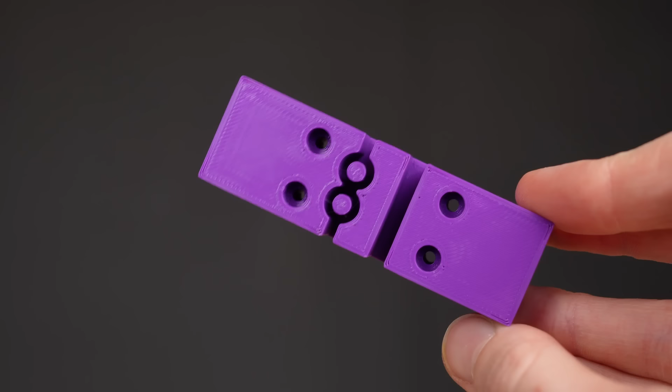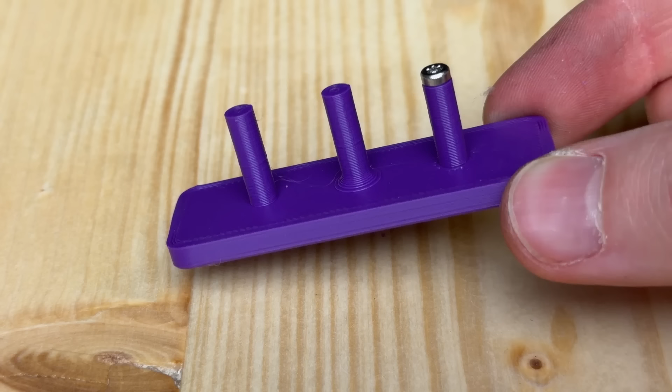In this video, I'll show you how to design for 3D printing. We'll take this gantry that I designed and improve it step by step in strength, tolerances, printability, and visual appeal. The tricks and methods shown here can be applied to any model in any CAD program. I'll guide you through my workflow and share my learnings from designing 3D printed parts for this robot.

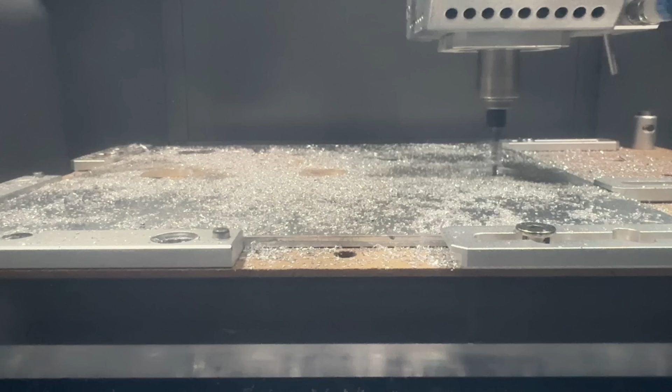Designing something to be manufactured comes with different sets of rules. While injection molding requires draft angles for part ejection, fillets are needed when CNC machining due to the round drill bits. 3D printing offers more freedom, yet it comes with other boundaries like the anisotropy of finished parts. This means that the parts have different mechanical properties in different orientations due to the layer stacking.

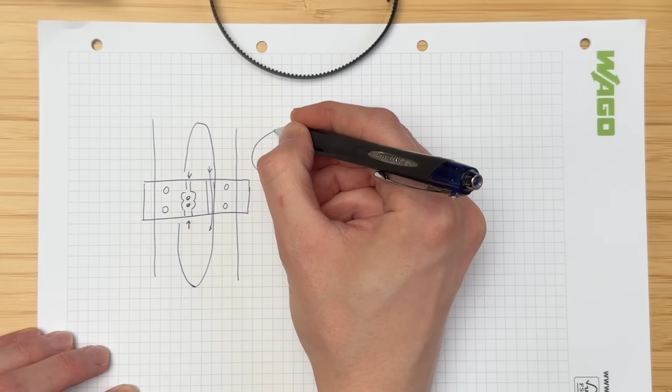That's one of the main things that needs to be considered when designing for 3D printing. And that's exactly what I want to explain to you in this video. We'll turn this sketch into a simple 3D model in Fusion 360 and then improve it step by step for 3D printing. Of course, everything shown here can be applied to any design in any CAD program.

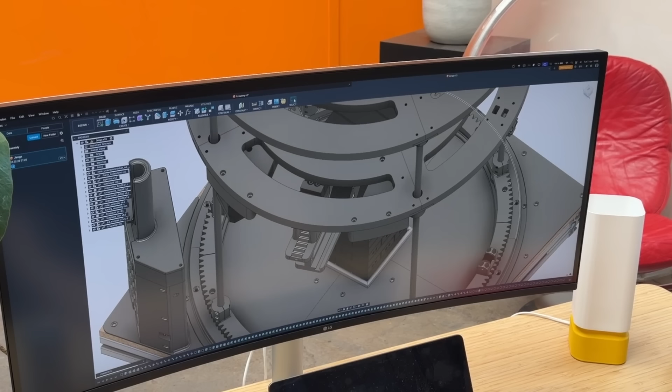So, when you start designing something, you might or might not have your own workflow yet. While designing parts for personal projects and a recent robot competition at university, I found a way that works well for me, but there are certainly other approaches that might work better for you. Anyway, in this video, I'll follow an iterative process, starting by defining an MVP, which stands for Minimal Viable Product. This is the simplest functional version that does the job.

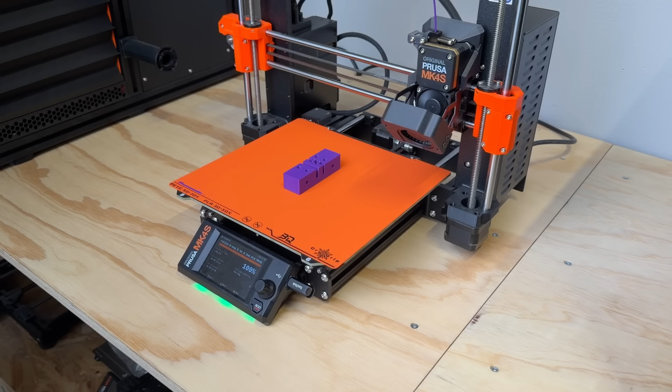Then, this design gets improved with each iteration in different aspects like strength, tolerances, and printability. Especially for beginners with little experience, it's helpful to actually print out some test pieces or prototype iterations to get a feel for dimensions, required clearances, and other potential issues. The more experience you get, the fewer iterations are needed.

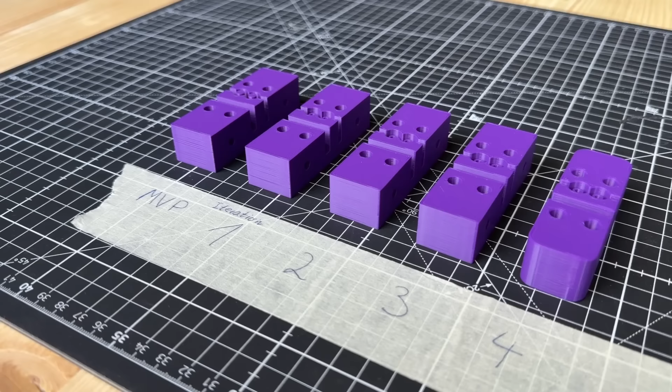While this approach is extremely useful for beginners as it provides direct feedback, there are other opinions on this. Christopher Helmke, who designed 3D printed screw counting automations, has a really interesting take on this that I didn't want to leave out. Luckily, he's located in the same industrial complex as me, so let's ask him real quick.

Okay, so my take is that you should do it completely different to Jan's approach, which is that you should try to make it first try, so only a single iteration. And in my opinion, that's right because 3D printing is much too slow to be part of a thought process. The actual benefit of 3D printing is not that it doesn't have a lot of manufacturing constraints or anything, but that it's low cost and thereby accessible to lots of people.

But there's also a big danger in that, and that is that you will start to print very, very fast. I actually don't like using 3D printers for my creative process because of that. If you start to print something, then you will stop to think about it. And you need a long thinking process about any part to actually get a complex design to work. And if you always stop in between for 2 hours at least to wait for the print to finish, then you will never get any complex system to work, in my opinion.

And the second reason is that you need to have very strong assumptions about how something is going to work to then test them. So the print that you will get out will not have any meaning to you if you have not put a lot of thought and work into it, and you will not improve your design no matter how many iterations you do. Actually, I claim you only have creative energy for like 5 iterations in you, and after that you're done. So don't waste them on useless stuff.

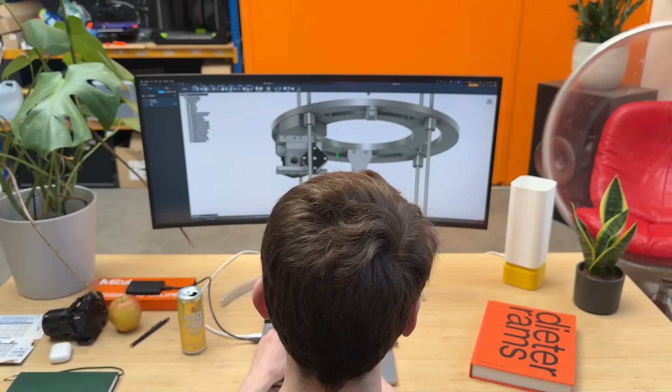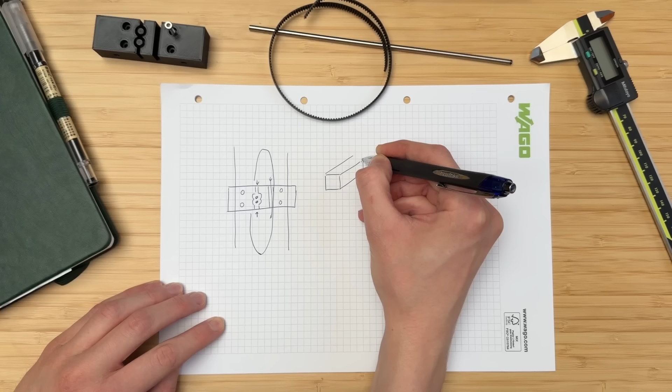So, take the whole process shown in this video with a pinch of salt. Try to resist the temptation of hitting print immediately after designing and take some time to really think through the model first. I needed a gantry for the x-axis of a low-cost robot that plays Jenga, but more on that in another video. For this part, I have a few specific requirements: the outer dimensions, fixing points, the rods it needs to glide on, and the belt attachment.

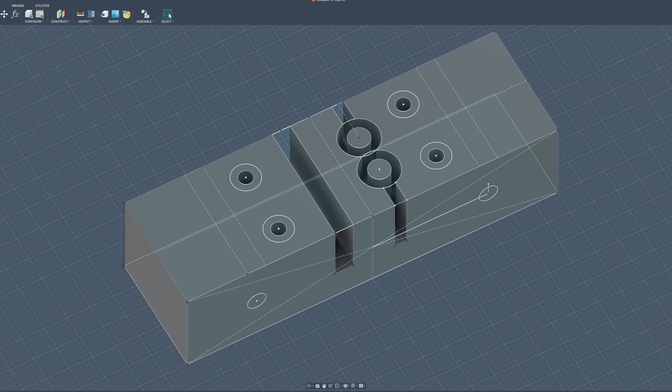To start, I did some research on similar designs, took some notes, and made a few drawings on paper. I then transferred those ideas into my CAD program using simple sketches and extrude operations. What I ended up with was a basic block with cutouts for the 2 rods, holders for the belt, and a couple of holes for attachments. Now let's print our MVP and see if it actually works.

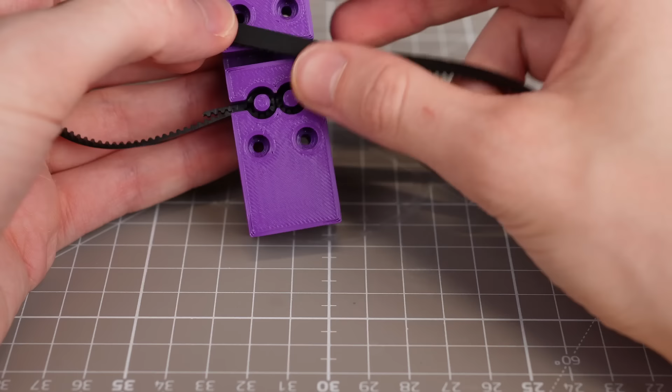Well, it does hold the belts. The rods don't fit perfectly, but with a little drilling they should be fine. The holes for the screws are a bit tight, but it works. I don't like the sharp corners and overall feel of it.

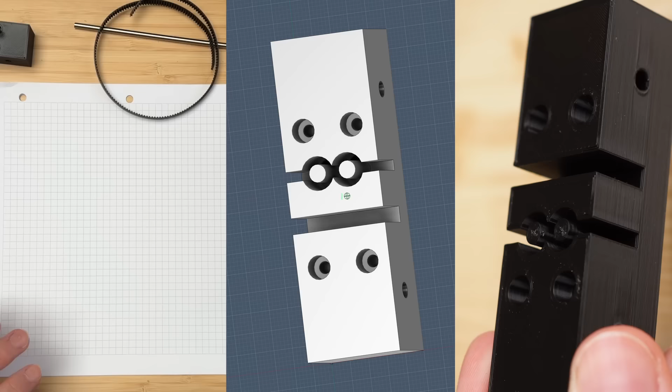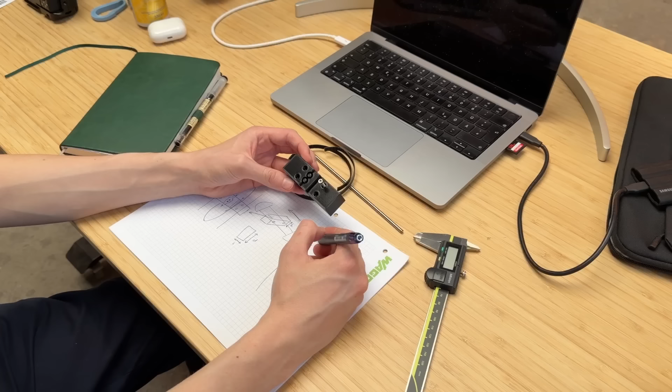I mean, it looks like a block with a couple of cutouts, probably because it is a block with a couple of cutouts. I wouldn't call it a good design, but keep in mind, we never wanted a good design. We wanted an MVP, something that proves the concept and motivates us to stick with the idea and improve it further. We can now take this physical prototype to make a list of things we want to change in the next iterations. Let's start with strength.

We have to ask ourselves, where does force apply to our object? In FDM 3D printing, parts are anisotropic, meaning they have different mechanical properties depending on the direction of the force relative to the layer lines. Because of this, it's usually good advice to look at the fixing points and try to bend your prototype in different orientations to find the weak spots.

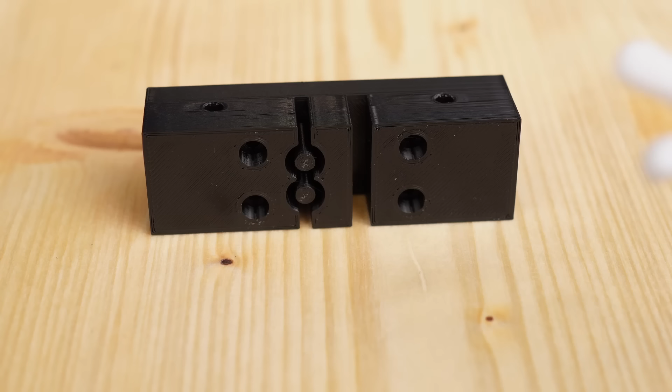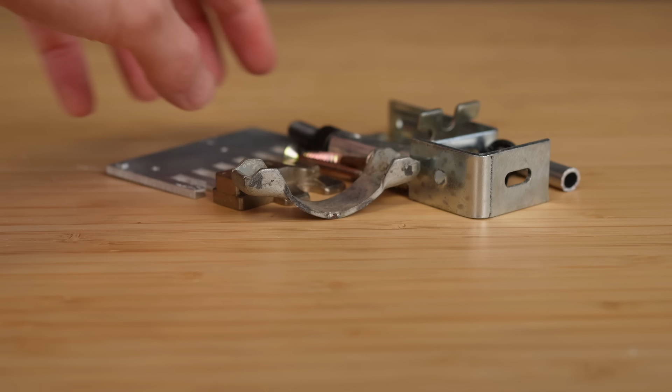In this design, there's really only one critical spot: the pins holding the belts. Because of our print orientation, these are standing in the Z direction, which is the weakest orientation of any FDM print. If you pull on the belts, it applies lateral force, making them very likely to snap right along the layer lines. Even if they might not break during normal use, we have to account for user errors, like over-tightening the belts during assembly. One easy way to solve this is to use hardware, in this case screws for reinforcement.

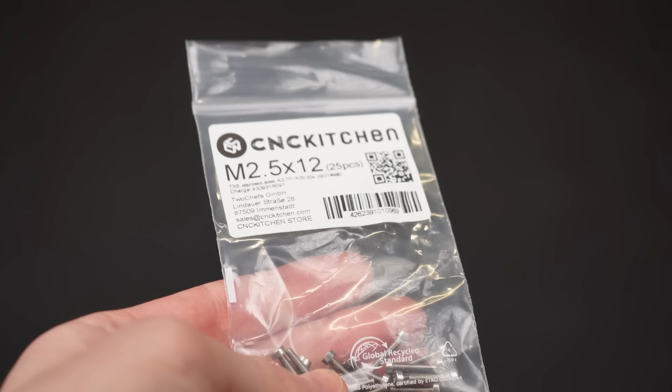I actually did a dedicated video on this channel about incorporating hardware into 3D prints to make them stronger. I picked these M2.5 screws from CNC Kitchen and took some measurements. Back in CAD, I first subtracted the length of the screw's head by selecting the faces and extruding them by that negative distance. Then I created a sketch to create holes for the screws to go in. To make the screws compress the layer lines, the holes should be tight. About 2.4 to 2.5 millimeters for an M2.5 screw works best.

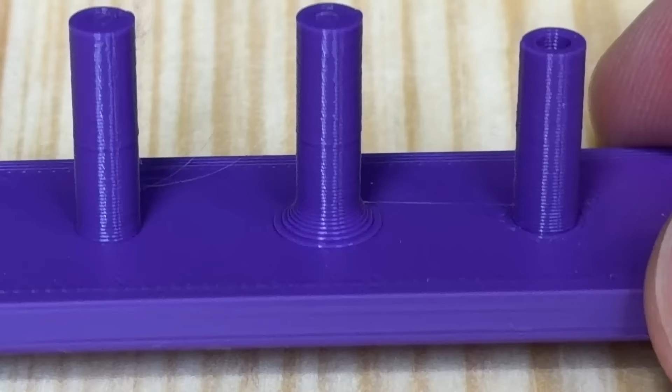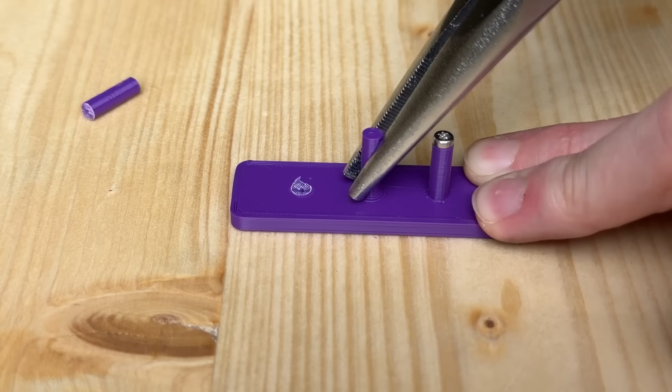For demonstration, I made a sample model with 3 pins. The first is a regular pin. The second has a fillet to increase the surface area at the base, and the third is reinforced with a screw. The regular pin breaks easily with very little force. The fillet pin takes more force but eventually snaps at the smallest section. The reinforced pin, however, is almost impossible to break. The screw keeps the layers clamped together and it holds its shape perfectly.

Now we can apply this to our design and print the first iteration. The screws go in as intended, and now it's time to adjust the dimensions for a better fit of the rods.

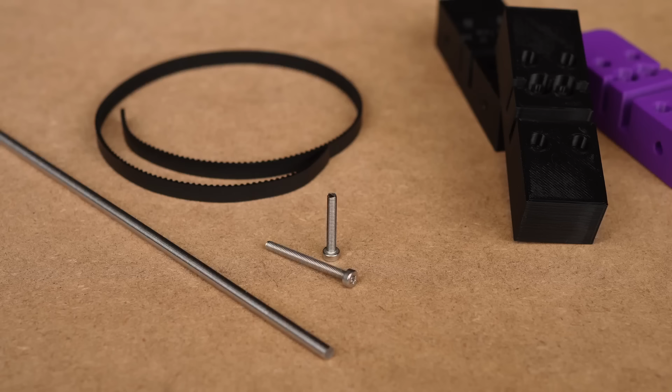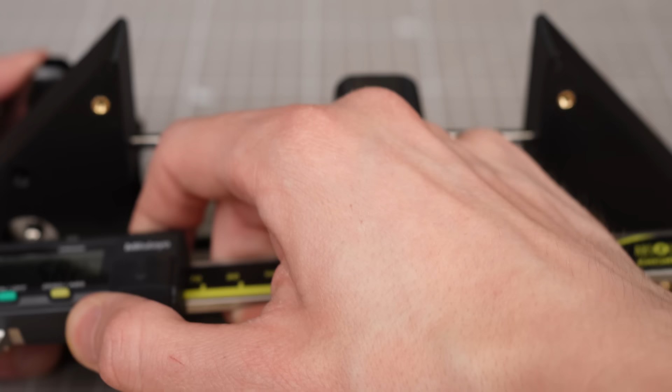Let's continue with dimensions. Because there are variations, or tolerances, in both our 3D prints and the hardware we're using, we have to design with clearance in mind. As a starting point, I usually aim for 0.15mm to 0.2mm clearance for holes to achieve a rather tight fit, while 0.3mm or more is better for parts that need to move or glide freely.

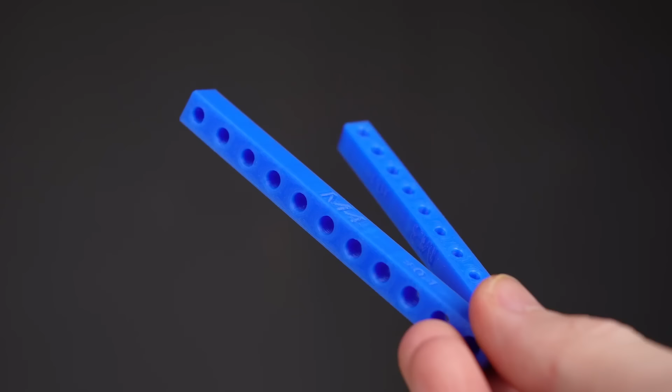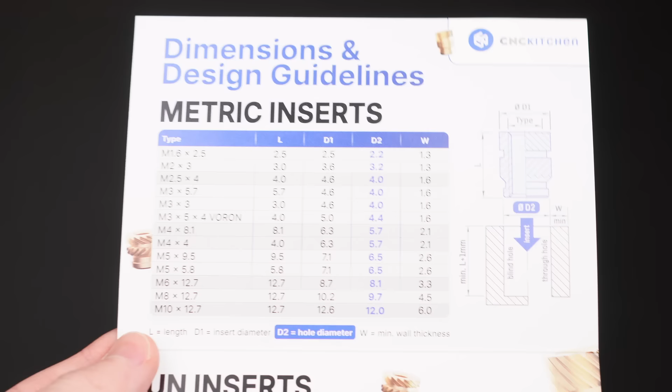However, these values aren't fixed. Every printer and material behaves differently, so it's a good idea to download and print a tolerance test board from sites like Printables. This gives you a physical feel for your specific setup. For some hardware, like the heatset inserts from CNC Kitchen, you don't have to guess, as they actually provide recommended design dimensions in the documentation, which takes a lot of the trial and error out of the process.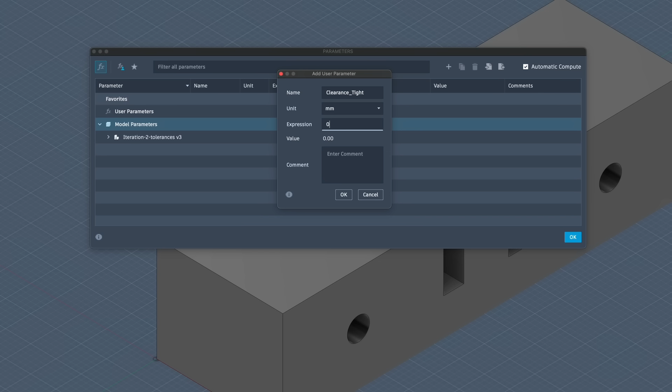In CAD, I added a clearance of 0.3mm for the screw holes and 0.4mm for the horizontal rod holes. Now here's a pro tip. I didn't just type these numbers into the sketches. I added them to the parameters list in Fusion 360. By defining parameters like clearance tight or clearance glide, you can assign these values throughout your entire project.

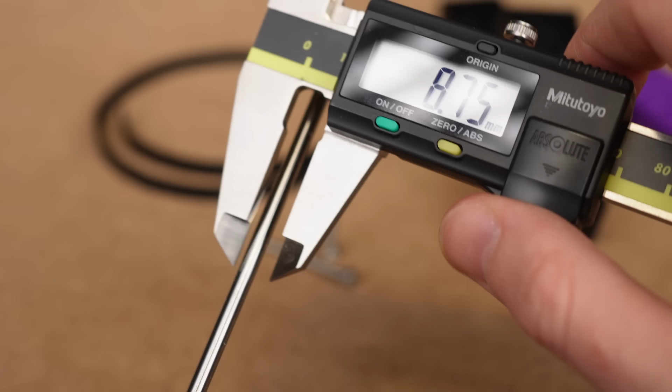If you finish a print and realize the fit is a bit too loose or tight, you don't have to go back through dozens of sketches. You simply change the value in the parameter table once and the entire design updates automatically. In theory, everything could be a parameter, but for most simple designs, I keep it minimal. Let's print this iteration and see how we did.

The rods now slide through with just the right amount of resistance and the screws fit perfectly. However, looking closely at these horizontal holes, they aren't perfectly round like we modeled them in CAD. The top of the circle is slightly drooping. Fixing this leads us right to the next chapter, printability.

When it comes to printability, one of the main goals is to avoid support structures. It saves material, reduces print time, and eliminates tedious post-processing. There is a good rule of thumb here. Most printers can handle overhangs up to 45 degrees without needing extra support.

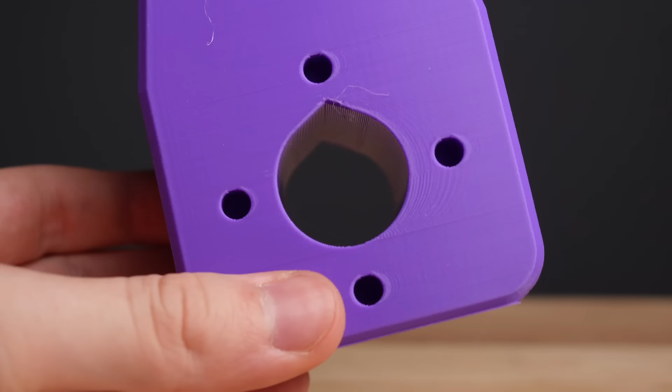This is where our drooping holes from the last section come in. If we simply increase the clearance to compensate for the drooping top, we end up with an oval-shaped hole that doesn't actually provide a good fit for a round rod. That's why it's a good idea to use a teardrop shape instead of a simple circle. By modeling the top of the hole with a 45-degree angle, the printer can bridge the gap perfectly without any sagging.

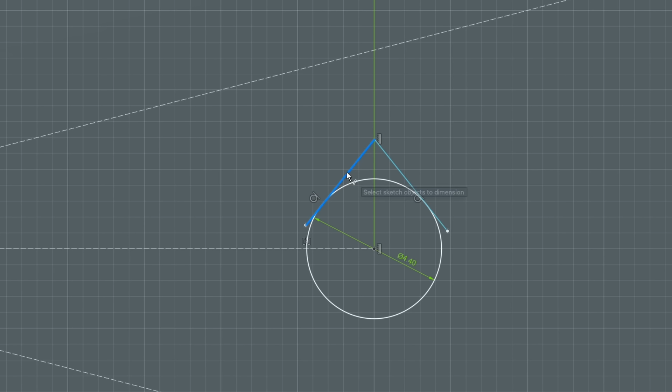Here's my workflow for this in CAD. I start by drawing two lines tangent to the top of the circle. I constrain the endpoints where they meet to be vertically aligned with the circle center. Then I dimension the angle between one of those lines and the horizontal to 45 degrees. This fully defines our sketch and ensures the printer can handle the bridge. Because this is more precise, we can actually lower our clearance here by 0.1 mm compared to a standard round hole.

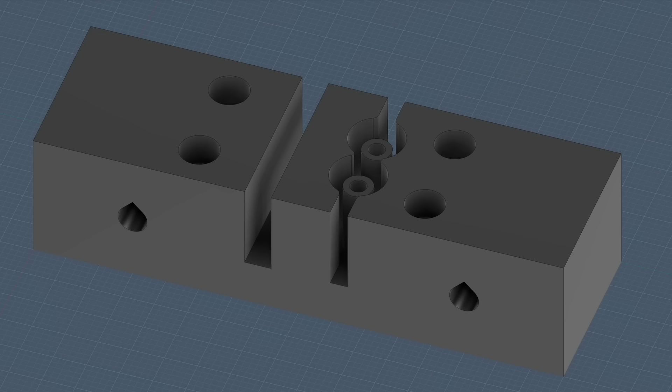I also use this iteration to add some functional chamfers. Specifically, I added lead-in chamfers for the belt paths and screw holes. These act like a funnel, making it much easier to guide the components into place during assembly. Plus, chamfers are a great way to hide the natural roundness of sharp corners caused by the circular printer nozzle.

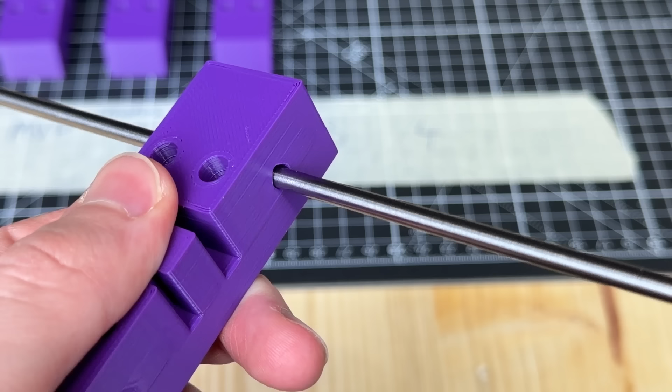Finally, I added a small chamfer to the very bottom of the part to compensate for elephant's foot, that slightly squished first layer. Let's get this final version on the printer and see the results. The rods and screws fit with only minimal play. We have a perfectly functional gantry now.

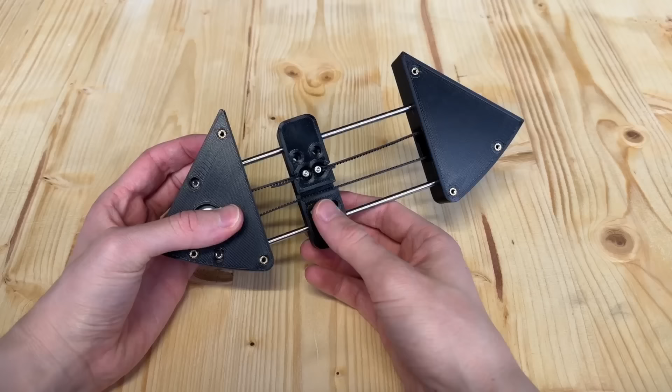Now that our part is strong, the holes are the right size, and it prints reliably without supports, there's only one thing left to do: improve how it looks. And honestly, depending on what you do, you might just skip this step, and that's fine. But keep in mind, whenever you show the design to someone, publish it online, or even just look at it yourself during assembly, you'll probably appreciate it if it looks a bit more interesting and unique.

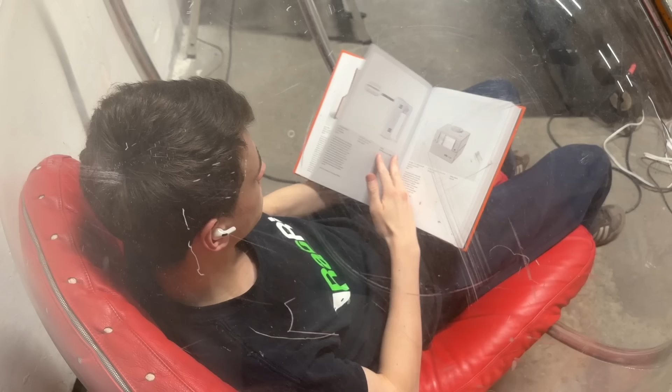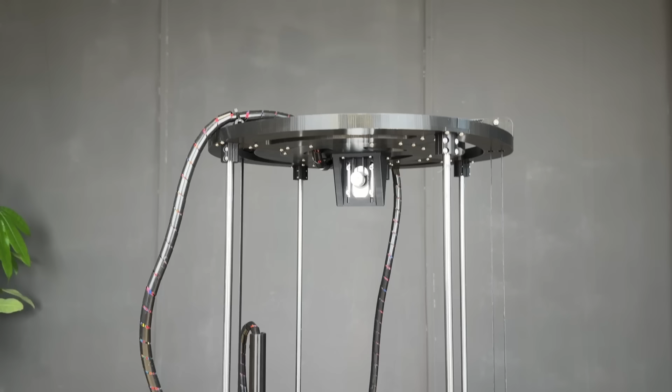I have to admit, I'm not an expert in aesthetic design, but I do appreciate well-thought, minimal and interesting design. I love thumbing through the complete works of Dieter Rams, for example. For design noobs like me, there are some simple yet effective tricks to make almost any part more visually appealing: rounding off sharp corners and using chamfers and fillets. I think it fits well within the whole design language of the robot.

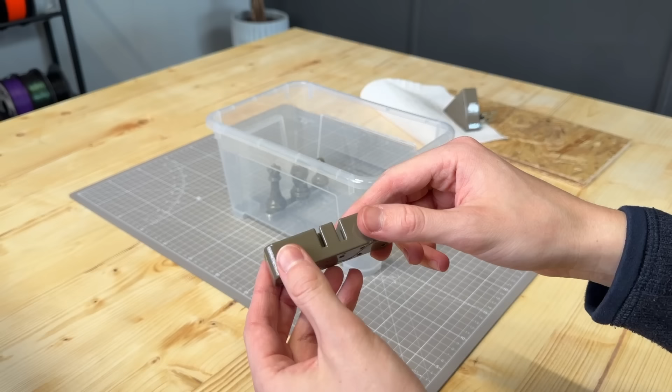Afterwards, you might want to consider some post-processing like sanding, painting or chemical smoothing. I actually covered this in a previous video, so feel free to check that out if you want a smooth finish. Well, that's how we got from this, our MVP, to this, a functional, minimalistic design that fits perfectly and does the job.

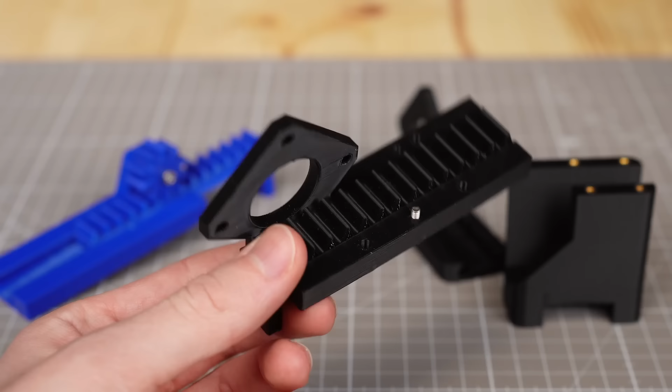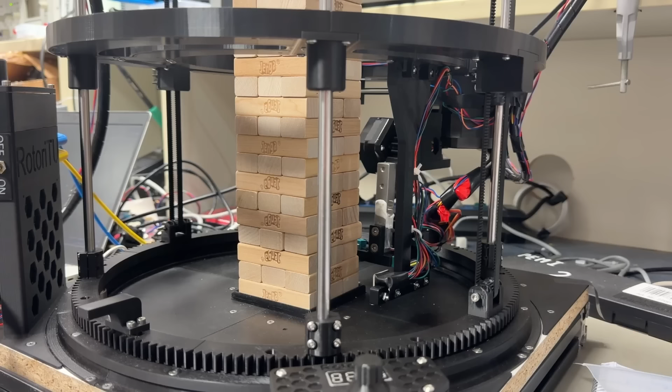This iterative approach is exactly how I design most other parts of the robot, like this axis, which uses a 3D printed rack and pinion gear system. I started with manual prototypes to dial in the dimensions and then integrated the motor and end stops into the final design. I hope this video gave you some useful insights into my workflow and how you can optimize your designs for 3D printing.